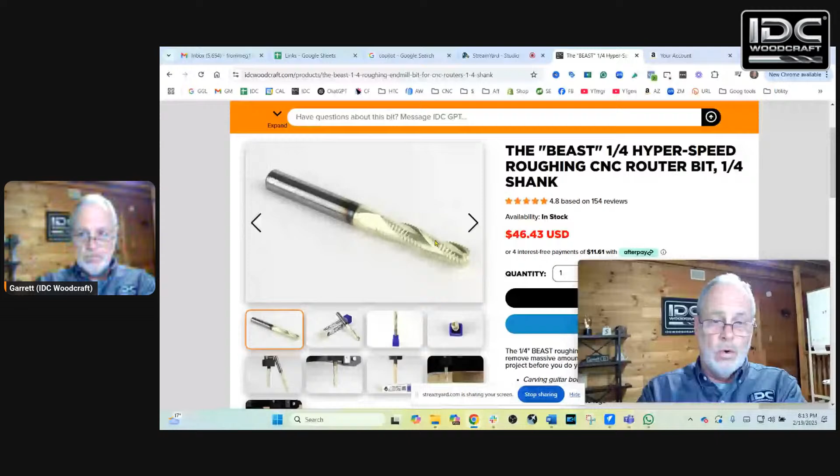We have that in 1/8 inch. We call it the Badger. We have a longer Beast, the 1/4 inch, and we have 3/8. Let me see if I can find it here. Yeah, right here. We've got it in 3/8 short and 3/8 long, and 1/2 inch short and 1/2 inch long. So if I can get my camera in focus, there you go. That's the 3/8. We call this the deep slayer.

So if you are looking to remove a chunk of material really fast, that'll save a lot of time and it'll spare your bits. And these roughing bits last a lot longer than the finishing bits. If you ever hear someone say finishing bits, that is like your upcut, your downcut end mills, the ones that leave a nice clean finish. That's the terminology we use in machining, roughing and finishing. So yeah, it cranks out the sawdust for sure.

All right, so Dan, got a question. I want to know if you can use a profile cut to cut out the large parts first, and then come back and go over some paths that use a smaller bit for the details. So no, if you're going to do a cutout first, right?

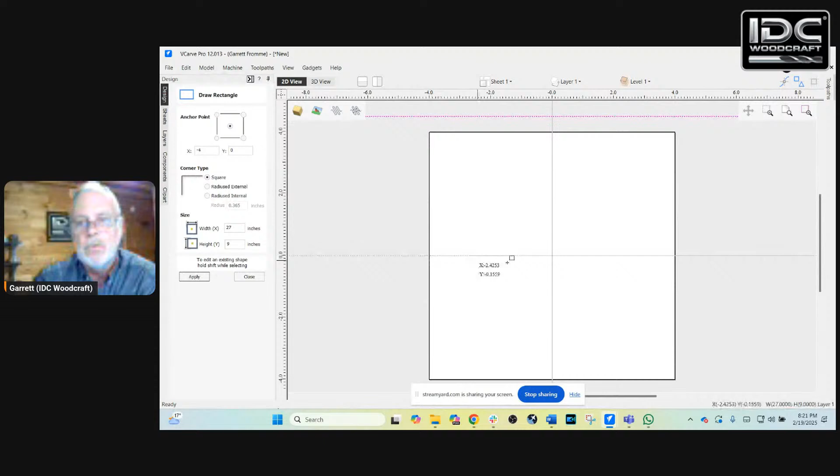Nope, that was a rectangle. I want a line. I'm going to do a line there to there. And this whole project is 8 inches. So I'm going to escape that. We're going to go over to toolpaths. I have the vector selected.

Now if you have Cut2D, I don't think you're going to have the fluting toolpath. You don't. Okay. If you have Cut2D, you don't have the fluting toolpath. So the third row down, it's the first icon to the left. When you hover over it, it says fluting toolpath. And you set your start depth and you set your flute depth. So we're going to set this at a depth of 0.5, half of an inch.

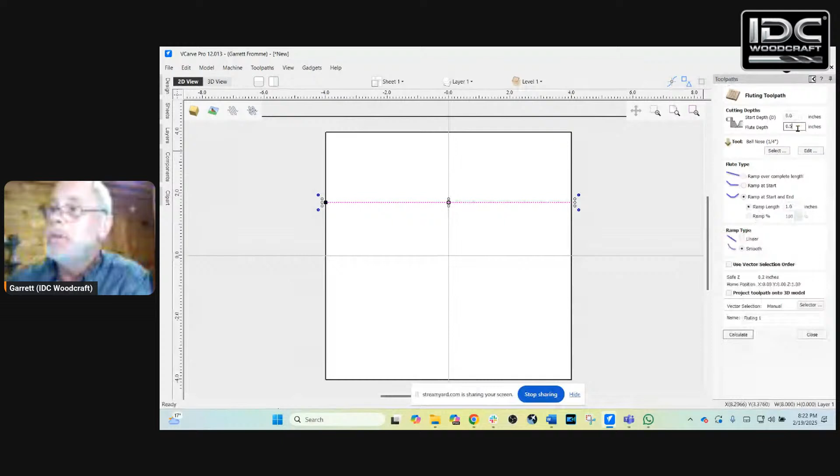Then down below that, it says flute type. And you have a straight ramp over the complete length, which is the first selection. The next one is a ramp at the start, and then it will go straight. And then the third one is ramp at start and end. And then you can set your ramp length. So since this project is 8 inches wide, I'm going to set my ramp length to 4. And that's going to be half the distance of this line.

And with this third item selected, it's going to start at 0 on one edge, go down half of an inch to the middle, and then it's going to come back up. Now I can tell the ramp type down below, where I have a straight ramp or a linear ramp or like a curved ramp. So we're going to click the linear ramp, and I'm going to calculate this. First I got to select my router bit.

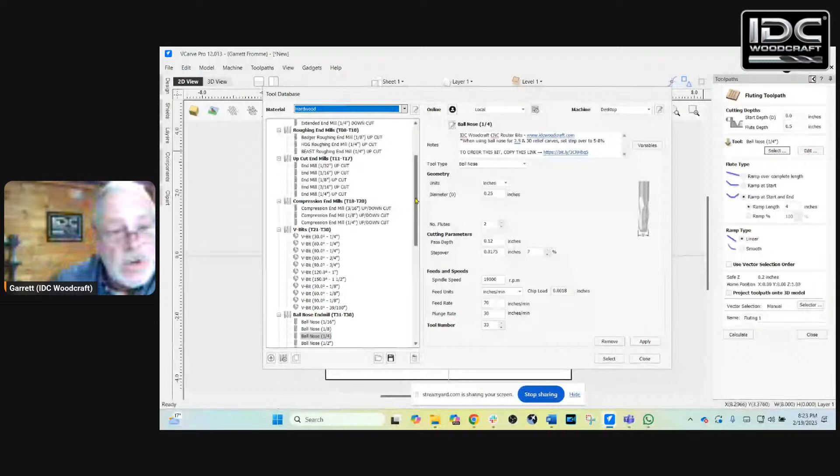So I'm going to grab my 1/4 inch diameter ball nose and select that, and then we're going to calculate this. And we're going to rotate that up and zoom in a little bit. And you can see this kind of V shape in the tool path. So what that's doing, it's starting at the top edge on the left. It's going to make 2 different cut passes. And it's going to be a V shape going to the middle. And it's going to come back out.

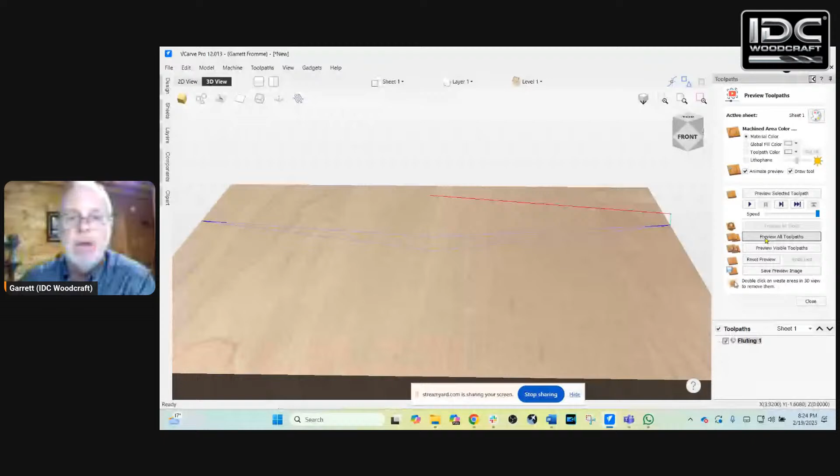So we're going to preview that tool path and rotate that down. And it's got straight lines towards the bottom of it because the bit wasn't wide enough for that. But you can see, I'm going to rotate that around. It actually goes down and comes back up. So fluting toolpath is what you want to use for that, based on what I am seeing you are asking here.

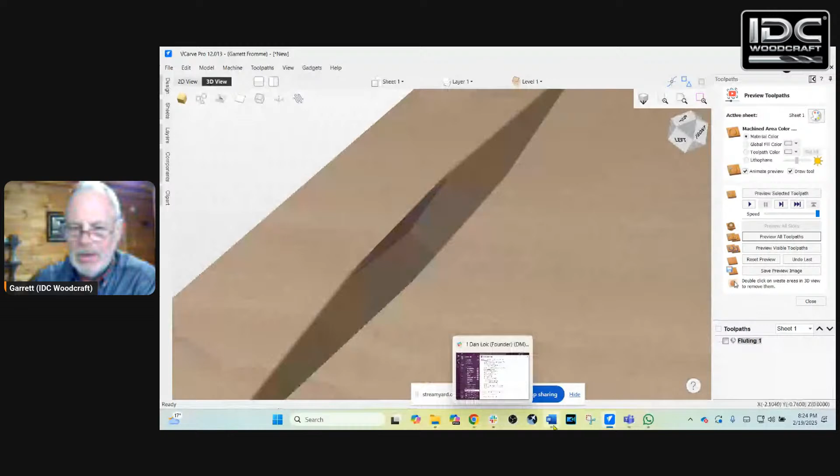Yep. So Tim, you can set the ramp length down for how far in, so it can come down a little bit, and then it'll go across, and then it'll go back up. You can do so much stuff with the fluting toolpath. One of the great little things for fluting toolpath is for making a soap dish. You can make your water drains just go out at an angle. So it's very cool.

Okay, so did you make a video yet, Liberty? Liberty, I'm going to bring you out. You can talk to them about what you got on the plate. I told Liberty it's time to come up with another project, and I think she's brainstorming with some of the ladies. Got anything going on?

Yeah, actually. So I'm working on the Vectric tool paths for 2 different projects right now. One, I had the ladies on Women Who CNC help me out and give me some input on. And my only struggle with that one right now is finding a piece of wood that will work, or braving the skills of gluing wood together. So how big is the project? How big is it? About 12 inches, maybe 15 by 10, but it's like 3 to 4 inches thick.

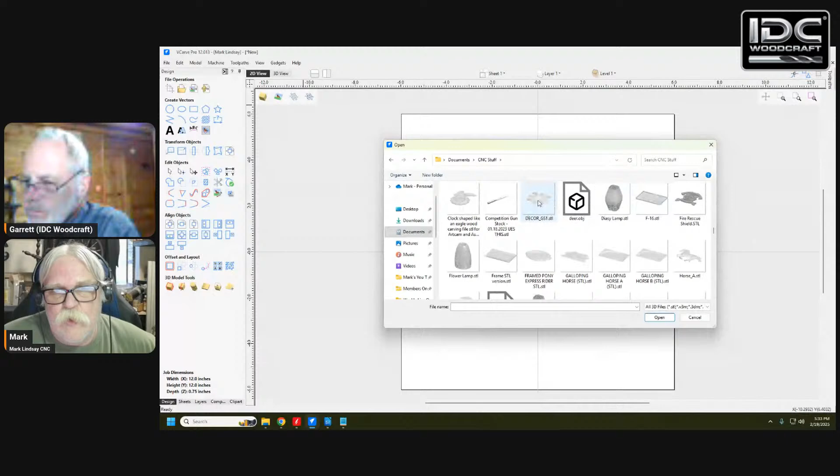Okay, so what I'll do is I'm in VCarve 12.0. I'll go up here to import a component or 3D model. You can also go through the file menu, import component or 3D model. It doesn't matter. They both do the same thing. Then I'll click on that and I've got some CNC files that I have saved here. Let me come down here and find one to play with. Oh, I'll use this one here. It's kind of a snowflake type of a file.

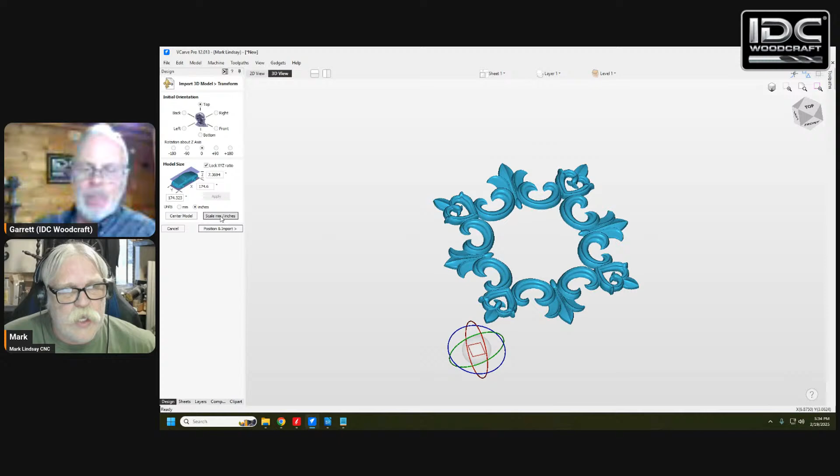I'll import that and it'll switch me over to my import screen. It's not really a snowflake, but kind of a snowflake. All right, now from this screen right here, we can see this red square down here. That's my actual material size. If you ever see this, this was created in metric. If we look at the size, 174.6 inches in X. Yeah, no, it was done in metric. So I'll just click scale millimeter to inches, and that brings it down to a more reasonable size.

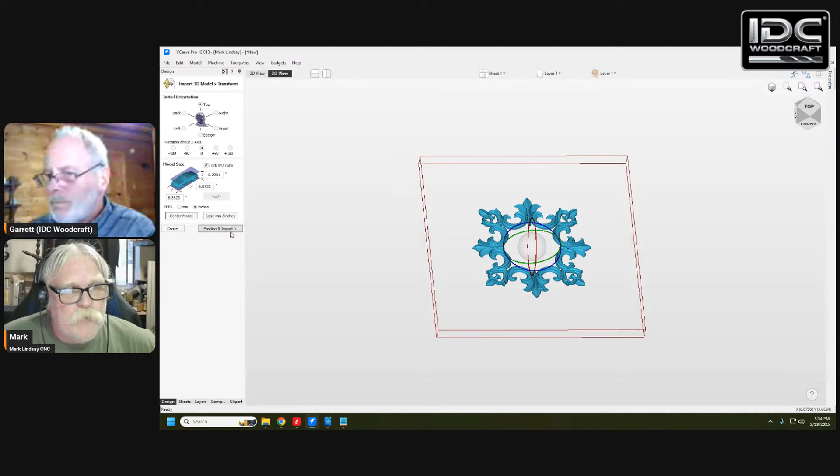Then I'll select center model. And that's got my model placed roughly in the middle of my material. And that's fine. I can do any scaling I need to do once I have it imported. So now I just want to position it. So I'll click on that, go over to position and import. What I'm looking for here is this gray plane is our modeling plane. That's our plane out in the program when we start creating the model.

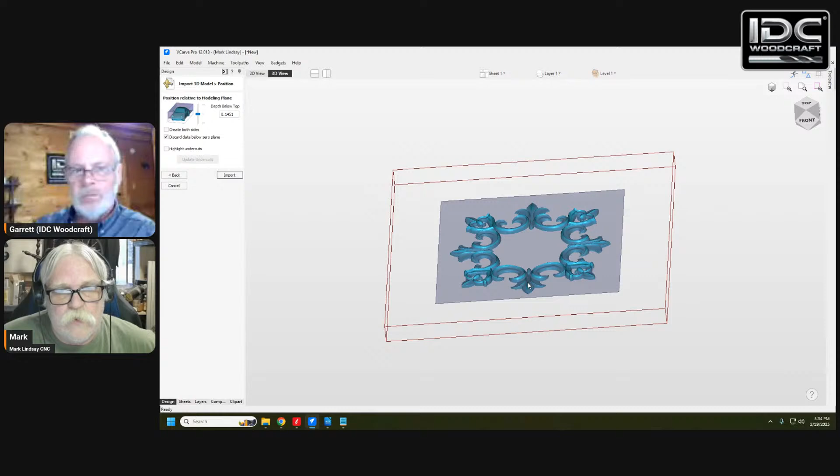What I want is, you can see how some of this is real bright blue. Some of it has a gray cast to it. Everything in gray is below that plane. So I need to bring the model up so that the bottom of my model is on this plane. And you do it with this slider right here.

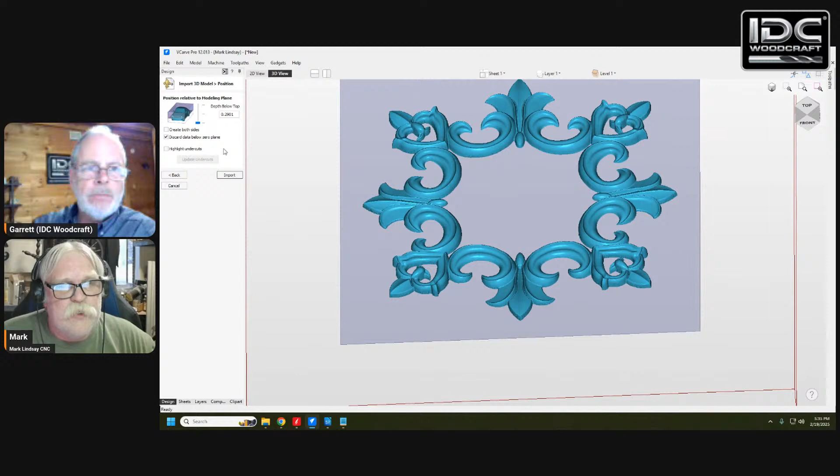Now, you have a couple of choices. If this is something like an egg shape, a complete egg, or a ball, a sphere, something that has a top side and a bottom side, you can import both sides. But on something that has a flat back like this, I want to discard anything that's down below this gray plane. Now, in this case, there's nothing there, so that's fine. Everything here looks good to me. I'll import it. Then that brings it in, and I'm looking at it in the 3D view.

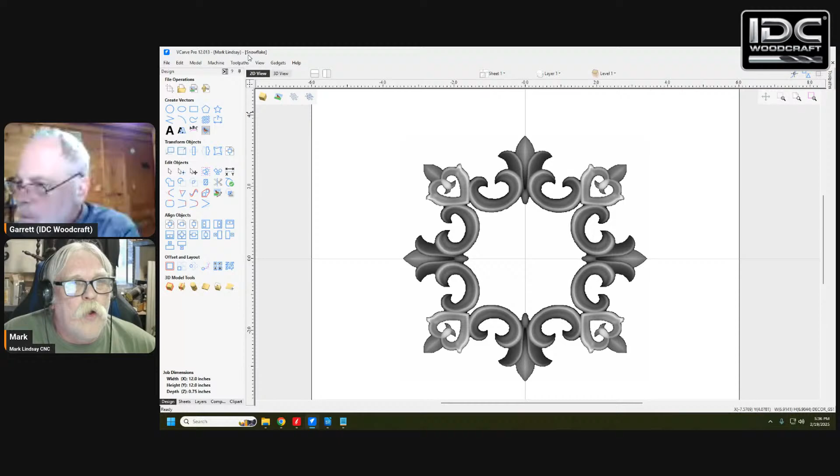Now, from here, I can look over my 2D view, and there is the grayscale bitmap from that STL file. From here, all I need to do is go over and save as. So I'll put it on my desktop, and I'll call it Snowflake. And save it. I no longer have the asterisk up here, and I have the title. Now I can close it. Now, I shouldn't have done that. Sorry about that. There's the file right here on my desktop. So now I'm just going to double click that file. And there it is with my 3D model.

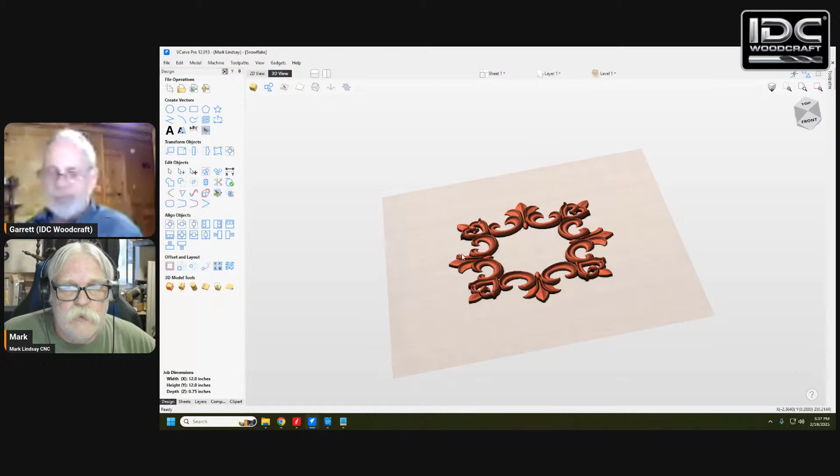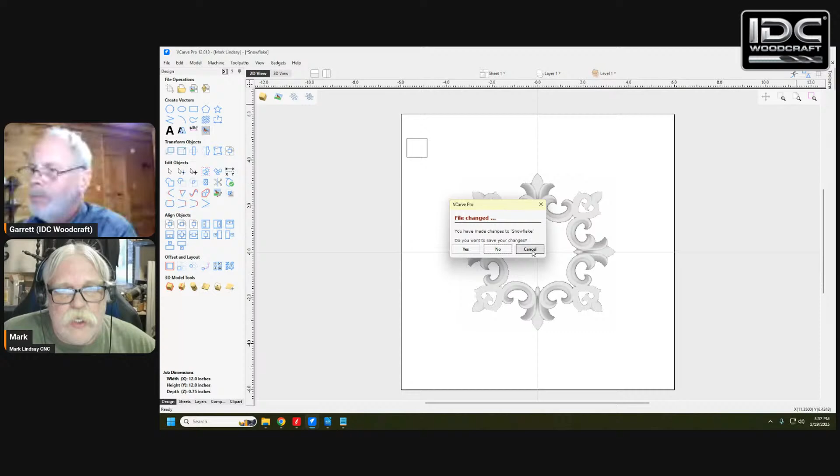And so it should save with this model if you have saved it after the import. If you don't save it, it should ask you. Let me do something simple and silly here. There. Now I've made a change. I have the asterisk up here next to the title showing me that I have not saved it since I made that change. Now, if I close it, it's going to ask, you've made changes. Do you want to save those changes? I can say yes, no, or I can cancel closing. But it should save with the 3D model if you have saved it after import.

Okay, and it would save with the 3D model as a CRV file, right? Yes, it's saving it as a CRV file. Now, because it's VCarve Pro, that's really all you can do. In Aspire, once this is imported, I can save this as a piece of clip art to put in my clip art library. But that's Aspire only. Okay. So you can't put it in your library. Right.

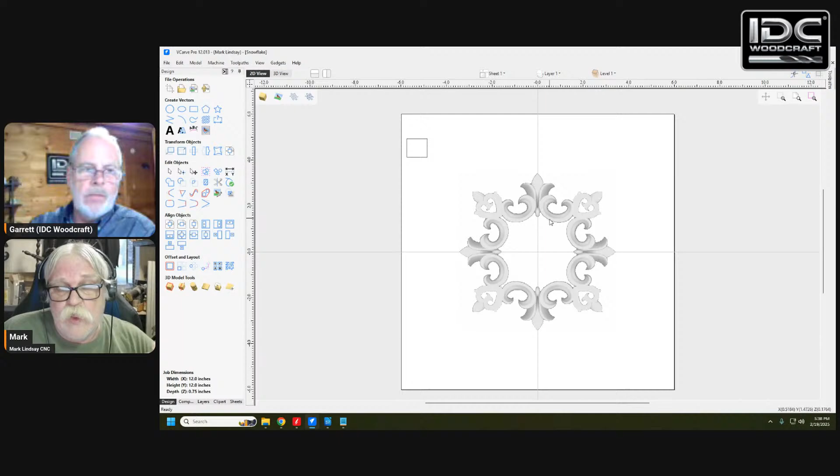You can, but what you're doing is you're putting the entire file into your clip art library. Oh, gotcha. So any toolpaths you create or anything like that will also be added in your clip art library. But there's nothing wrong with that. If you use it a lot, you certainly can. Okay. But if it's not saving with the STL file imported, shoot an email to Vectric support and let them know, as you may have an issue.

All right. Cool. All right, folks, I do know that my image is fuzzy. I have slow internet where I'm at. We are working on it, but it's not hardwired in. I had one internet service and then got another one. Now I have satellite service, which still is not as good. So the team is diligently working on that. All right. Let's see. Okay.

Someone's asking Jeff, Altmill, is it really worth the money? Well, folks who have an Altmill CNC router, I'm assuming. Yeah, I was going to say, I think he's talking about the Altmill, but I'll shut up. Yeah. Folks, for those who have an Altmill CNC router, let's let the audience speak about it. But I will say what I like about the Altmill. Number one, its price point for its performance is

nuts. I would not have expected a 4x4 machine to come out at a $3,100 price point range, and when it does the STL files, it's so quick. They really focused on shortening the acceleration and deceleration time, which, yeah, super quick. So I will let folks who own it give you their input. Let's see, Ed says Altmill is almost certainly worth the money.

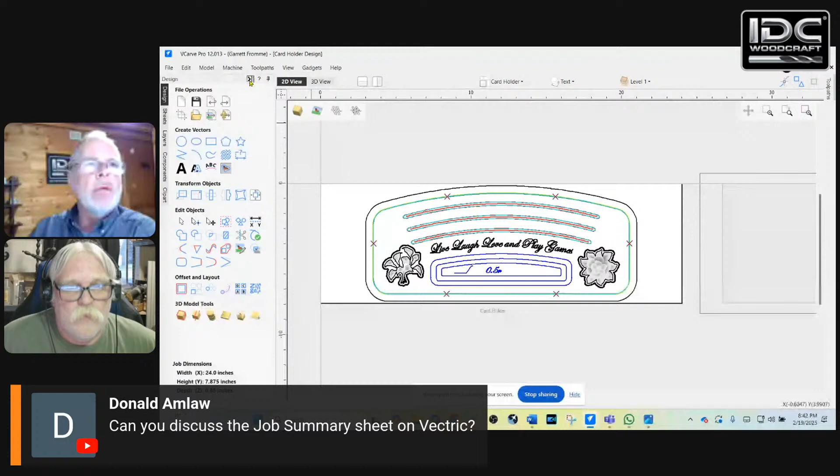So this is the card holder, and I'm going to go over the toolpaths. Oh, perfect. All right. And so right next to the save toolpaths button, there is a button. It's like a little piece of paper, and it says create job sheet. When you select that, it's going to ask you where you want to save it. It automatically titles it Card Holder Design Summary. Card Holder Design is the name of the file that has this project in it. And when I save that, I can go into my directory and we can open that up.

And I now have this summary. It shows the drawing. It shows a lot of information about the zero points on the project, where the router bit's going to be at the home position. It shows all the router bits themselves. This I'm going to send to Vectric, because when it creates a second line on the router bit name, it doesn't create the second line for the other one. So the router bit names are running past the actual toolpath name. So it's got all the toolpaths. They are aware of that, and a fix is coming.

Okay. All right, cool. Yeah, so it's got the toolpath summary, and I'll let Mark talk about the rest of it. Well, basically, that's it. Everything you said is pretty much it. They are aware of the times not moving down with the first line of each bit, and a fix is coming for that.

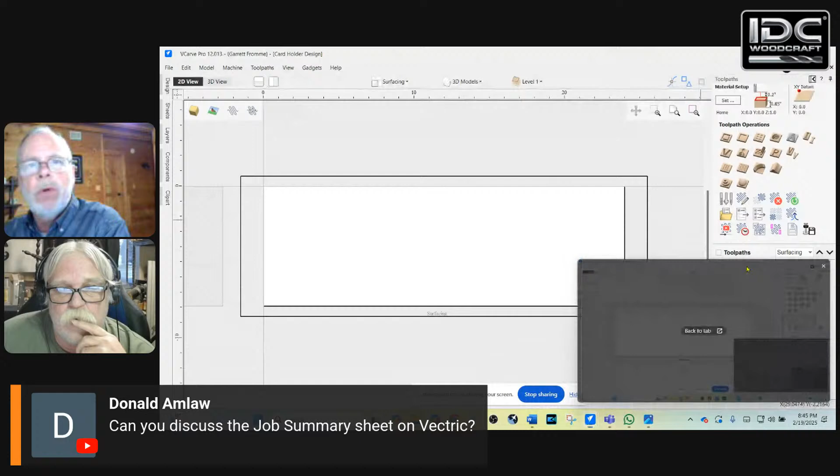Donald Amlaw is asking, can you add notes to the summary? Yes, you can. You do that in toolpath notes. When you go to save the toolpath, you can put notes in there. Well, maybe here I'll switch over and you can show me where to do that. Okay. Let's see. When you go to save your toolpath, I gotta shut this screen off.

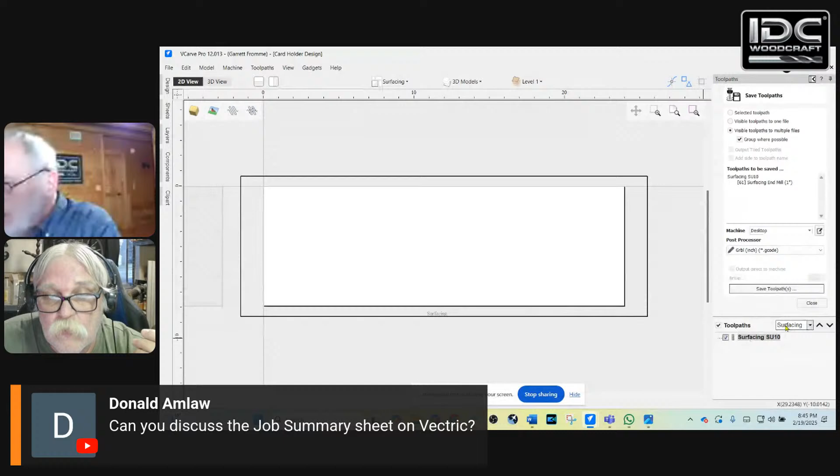Okay. When I go to save, right there should be notes. Okay. So select the toolpath, I got the toolpath, and there isn't a notes blank there. No, let's go to the other one here. Wait a minute. So I got all the toolpaths, and I don't see a notes button here. Huh. Okay, let me jump in and see if I can find it. Now I've got to remember where the heck I had that.

But anyway, this job summary is very helpful because, number one, at the top you have your design. Then they tell about the material setup, and they have the size of the material. Then they talk about the home or start position. Like if you do the lower left corner, it tells you your Z datum position. For this one, the Z is at the bottom of the material. Oh, I'm sorry. The home or start position is at X0, Y0, and then a Z 1.85.

Right. And here it tells you what corner you're going to zero out on. And then here it's got your pull up, the clearance. So when the router bit needs to carve and then has to pull out to move to another spot, in this case it'll pull up 0.2 inches and then do a rapid move. The toolpath summary: this is all the toolpath names in the first column.

That's where toolpath notes is. Okay, where? Where's toolpath summary on the software? I'm sorry, I had the wrong one. Okay. Close that and go into toolpath summary. Right there, that would be the clock. There's the notes field right there. You can enter your notes right there, and that's where you can put notes into the job summary.

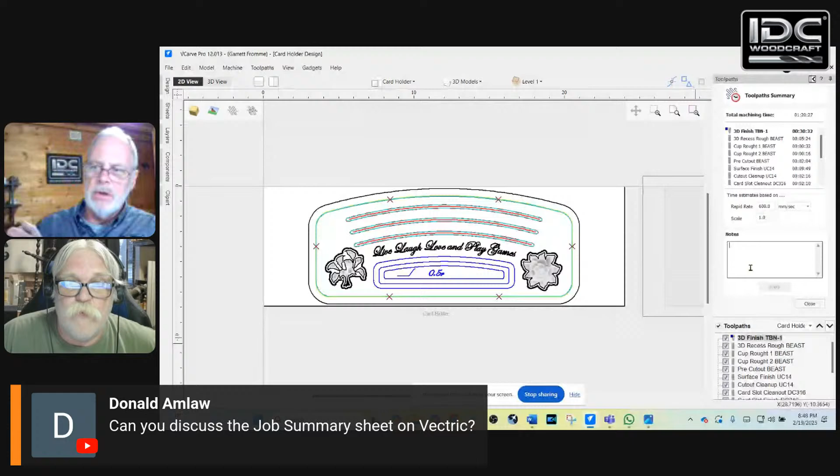Okay. And is this not a note for toolpaths, but like a general note that you can put in? No, this is a note for toolpaths, and you can select which toolpath you want that to appear in. If you just want general notes, that's something else. All right. So I am on the fourth toolpath. I'm going to say hello, Mark, and then I'm going to close that. You have to click apply first. Okay.

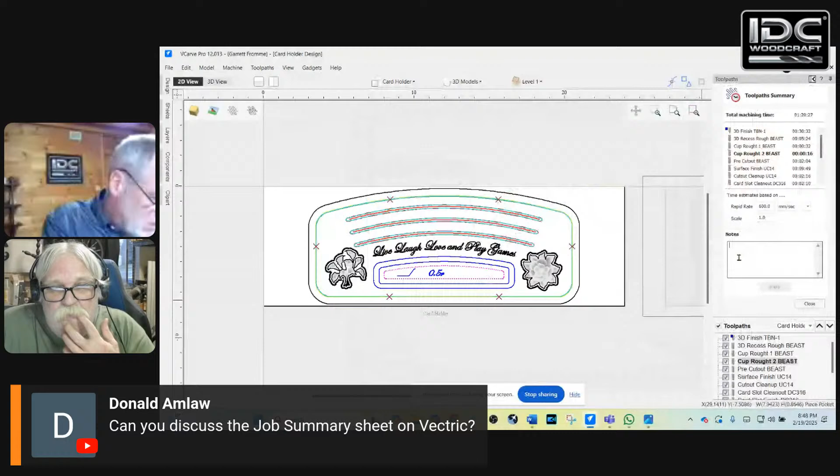All right. Oh, I see. So hi, Mark. So I'm learning here too, folks. There's a little apply button there. And we're going to close that. Now I'm going to do the job summary again, and we're going to type in job summary 1. And I'm going to go to my directory and open that one up. Where is it? There it is. Job summary.

Okay. So I put it in the fourth toolpath. So there's all the toolpaths. There's toolpath number 1, that's the toolpath name and all the information about that toolpath. There's number 2, number 3, number 4, and so it should put hi Mark in this one. I believe it's the fourth one. I thought it was.

Okay, it's putting in. No, folks, we're learning too. It's putting in the tool. Okay. It's not adding toolpath notes. It's just adding tool notes. Okay, it appears that you're going to have to put that in the... Oh, wait. Always ramp it. Okay, no, that's fine. Never mind. Nope, it didn't add it. Wow, make me a liar here.

Well, you know what? I hate doing things by memory. I'll have to play with it. Well, you actually did it once in a different thing that we did, and it showed up. So,

So that's the job summary, folks. It's a really good, handy tool to have because it prints everything out in order of your order of operations. It gives you every piece of information you need, including your material size and all that good stuff.

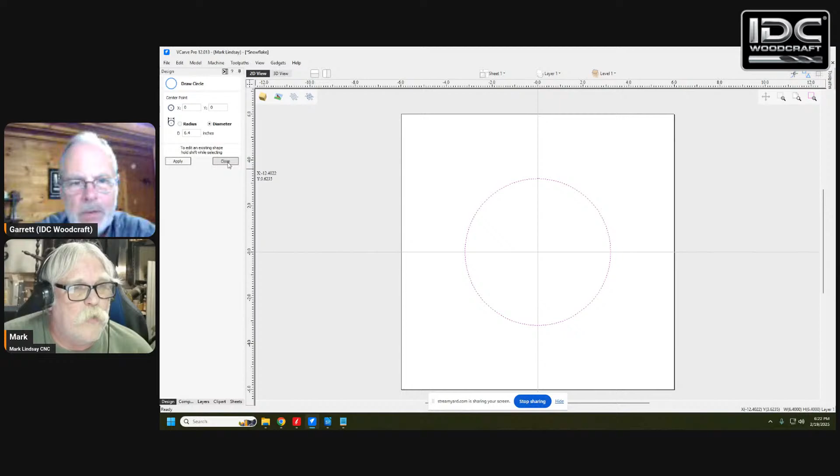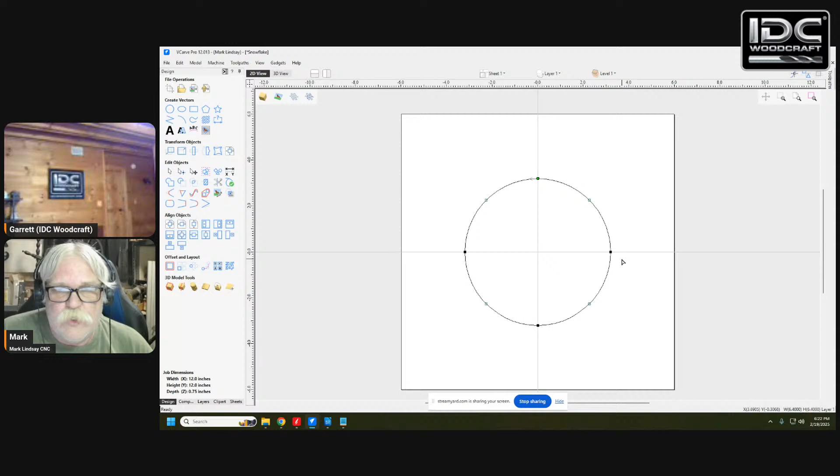Okay. Making a circle here in the center of my piece of material. Now, I'm going to make 2 arcs out of this circle. If I'm putting text all the way around the circle, then you still need to pay attention to this. I'll tap the letter N on my keyboard to go into node editing. And we see that I have 4 points here. Now, if we look, my start point is right here. And the direction, you can see an arrow. I'll zoom in, but the arrow is not going to get any bigger. You can see an arrow right here saying that the circle is going this way.

You want that circle to be going that way. We read left to right. If you draw something, it's going to draw right to left. It'll be backwards and or upside down. So what I'll do over here is I'm going to go to this side, and I'm going to right-click that point, and I'm going to cut the vector. I'm going to right-click this point, and I'm going to cut the vector. So now I have 2 arcs.

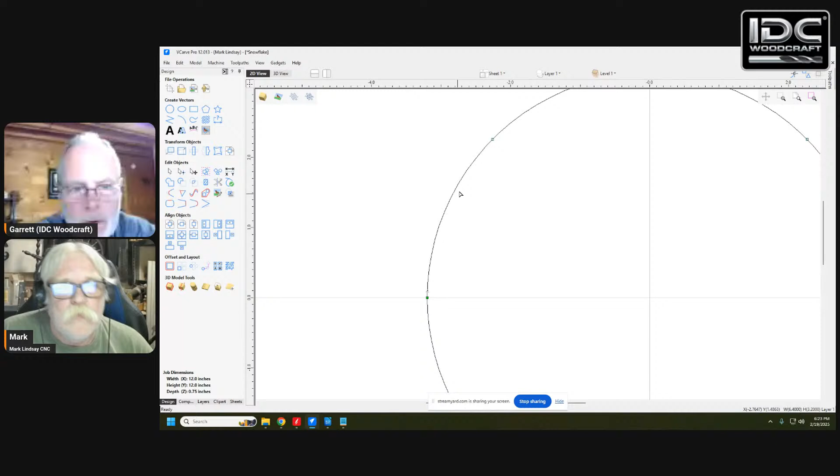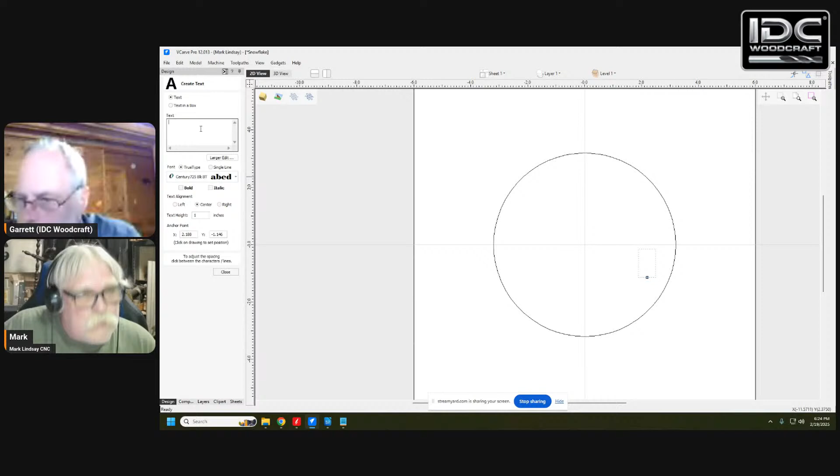Now I've got this arc with the arrow pointing this direction. My letters are going to follow it that way. If I look over here, select this vector, this is my start point. My arrow is pointing that way. My letters are going to go in that direction. That's what I want. Now, let me create some text. And I'll just type my name here. And that's way too big, but that's all right. I'll shrink it down, make it a bit smaller. And I'll put it right there just for giggles.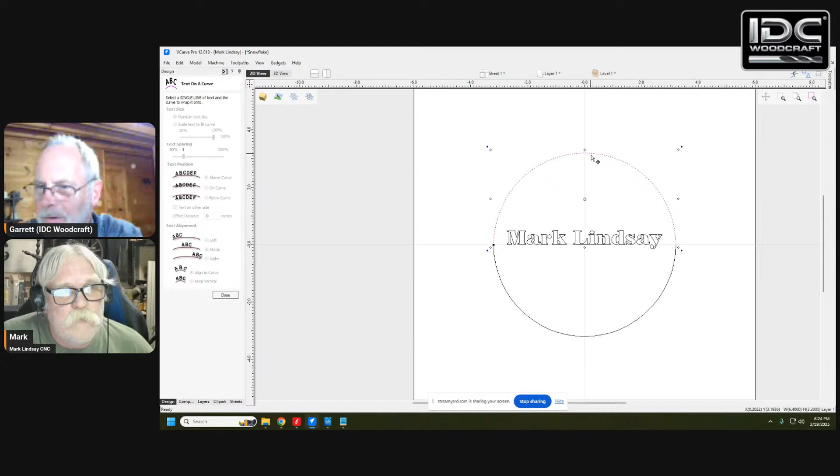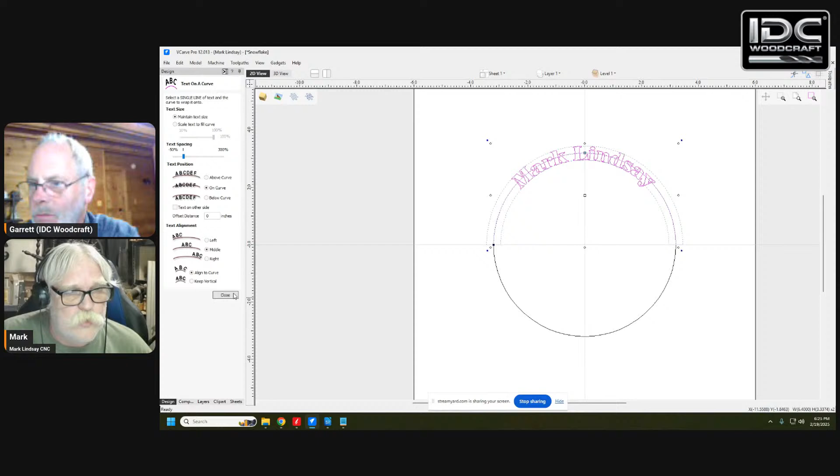Now I'm going to come over to this icon right here. Put text on a curve. I need to select the text first, then the curve. Now you notice that jumped up on top. I can have my text above the curve. I can have it below the curve. Or I can have it running right through the middle of the curve. But the important thing is that start point has to be over on the left. If the start point is over on the right, and I'll do that just to show you what it does, I'll go into node editing here, and I'll make this the start point.

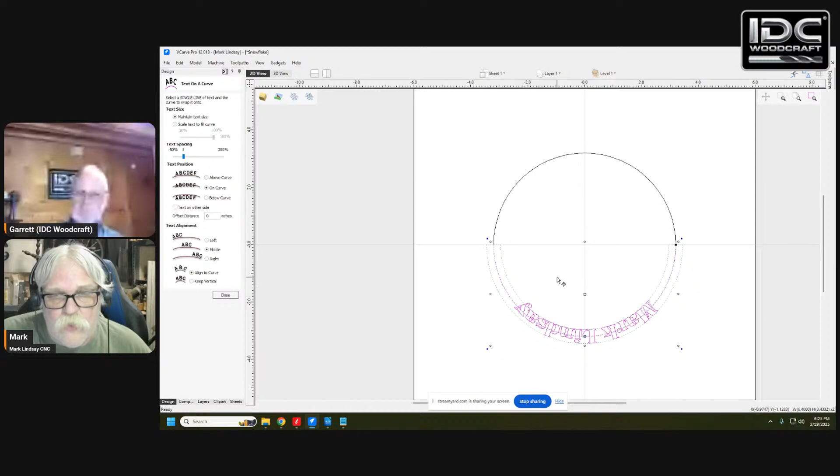Okay, now if I go to text on a curve, I select this text and this curve, it's upside down and backwards. And it's all because of that start point. So if I Control Z to undo that, get out of here, Control Z, select this, go back into node editing, make this my start point. Now I can select my text, go into text on a curve, and it's the correct way.

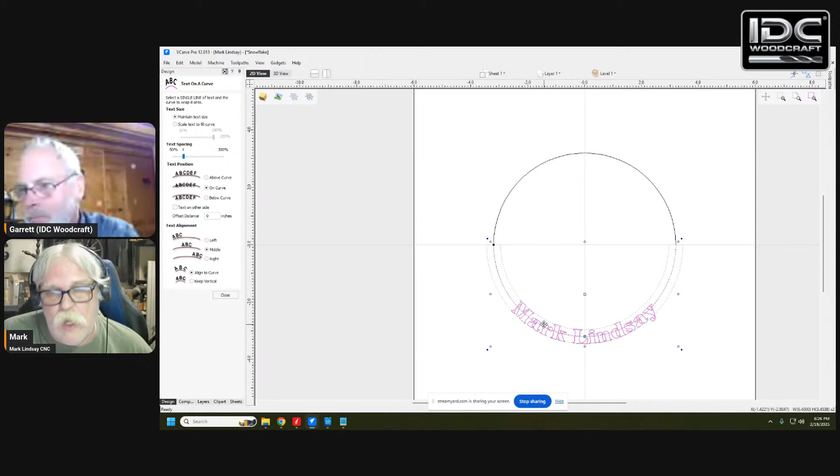So that's basically it. Your start point has to be on the left for either top or bottom.

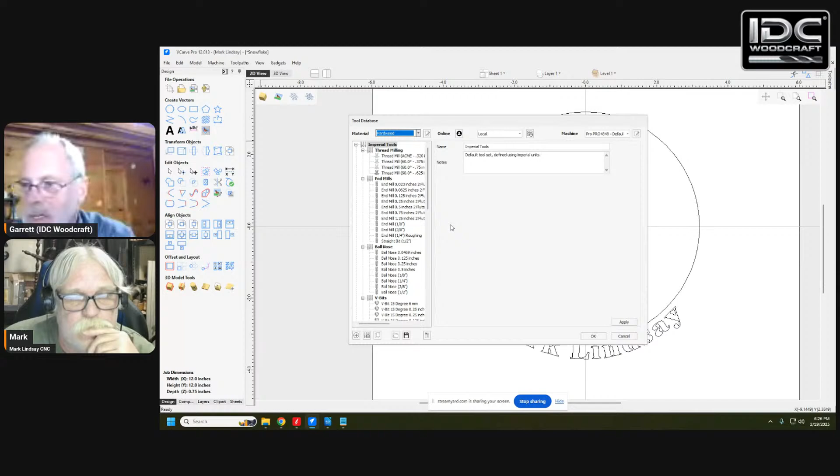There's no way to mark these really as favorites. So if I pick my 1/4 inch end mill, there's no real way to add this as a favorite. But what you can do is you can cheat by adding it as a material. If I come up here next to material and click this down arrow, I've got several different types of materials. I'm going to add a new one and I'll just call it favorites. Okay, and apply. And now I'm in my favorites tool category.

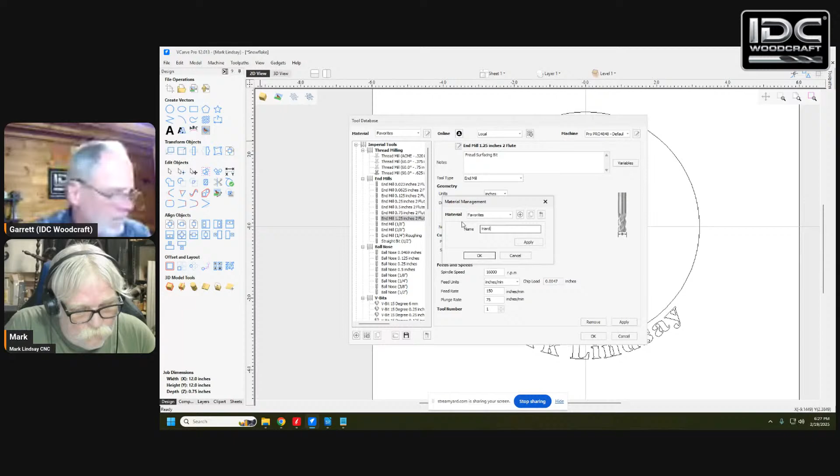Let me check on this. Am I in that? Yes, I am. Well, now wait just a minute. I didn't add this, did I? Pulled all the data. What I was thinking, Mark, is it pulled all the data over there. It sure enough did. Oh, I renamed this one. That's what it was. Holy cow. I didn't add a new one. Let me go back and change that. I didn't add a new category. Come on, Mark. You know how to do this. Yeah.

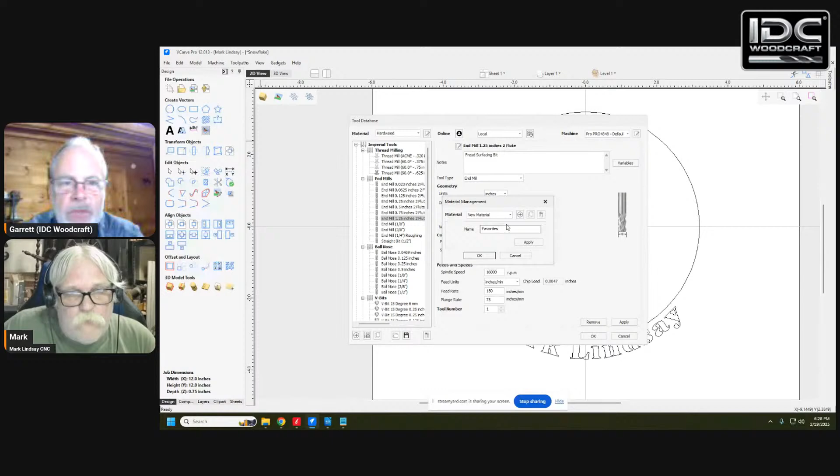Okay, now here's where I want to add a new material. Add a material to the database. There we go. That's what it was. Good grief. Favorites. Click apply and click OK. That's how it works. So I still have my hardwood. That's what I was looking at.

So you'll go into the open material management right here. Click on the plus button to add a new material. Then name it. Now I have my favorites right here. And if we look at my 1/4 inch end mill, I have no settings down here, nothing. I can copy the settings from this tool for my machine from the hardwood category, click copy, and now I have this bit copied to my favorites. I click apply, and you'll notice that my bit is active and highlighted right there.

I can do the same thing with other bits if I want those in my favorites. Then I can put all of these favorites into one group if I choose to. I can't remove these bits from just this material. It's just this is now the only bit that's within my favorites category. I don't know if that helps or not. Yeah, that's one way of doing it.

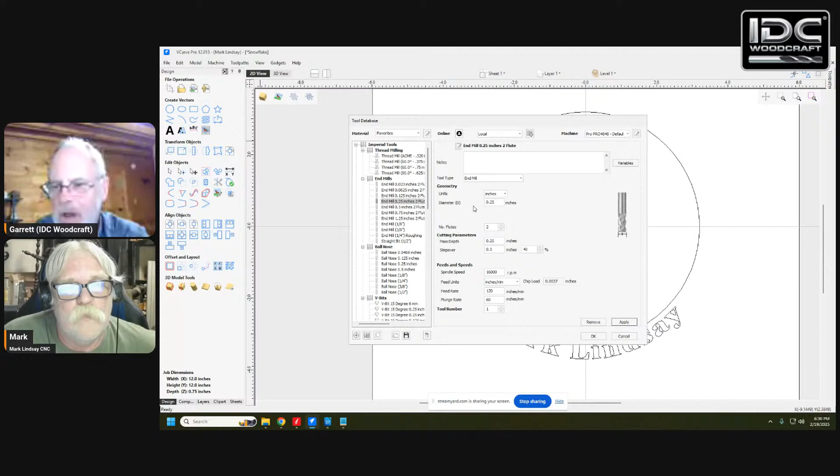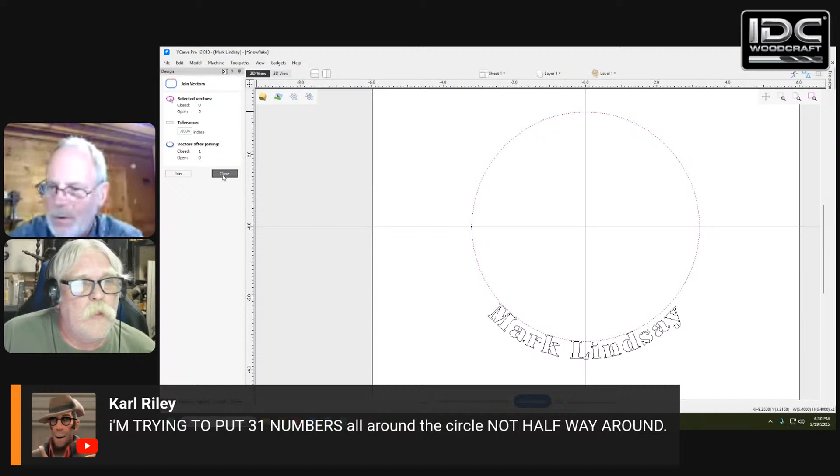Karl is saying he's trying to put 31 numbers all around the circle, not halfway around. Oh, all the way around. Okay. Well, then here's what we'll do. We will join those vectors, so we get one closed vector. Now let me go in here. Come on. Join. One closed vector.

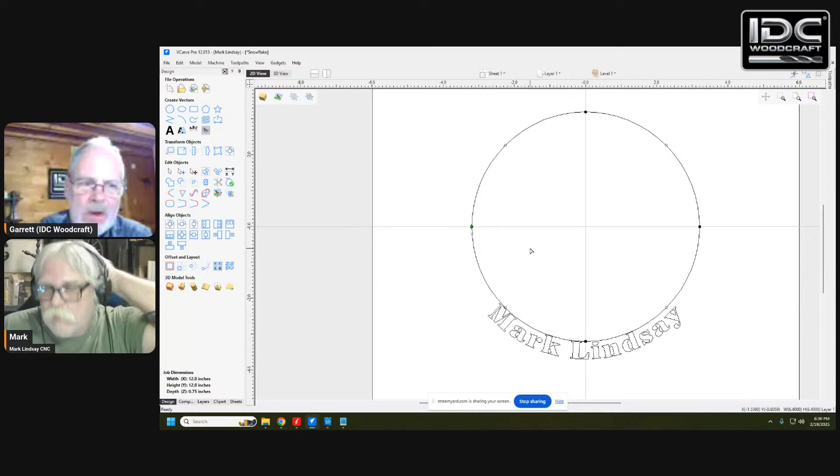Okay, so if I want to do that around the circle here, let me go like so.

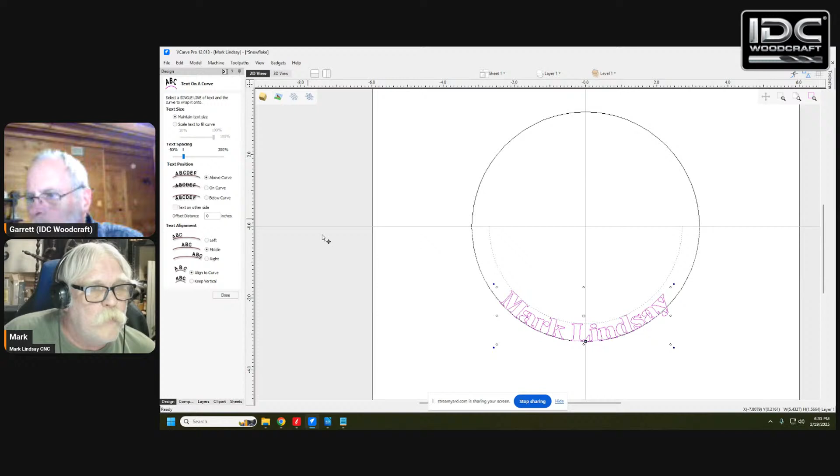And I want to go above the curve. And it's not going all the way around the circle, but at least it's correct. The start point, I've got to get out of here. The start point is here, and my circle is being drawn in this direction.

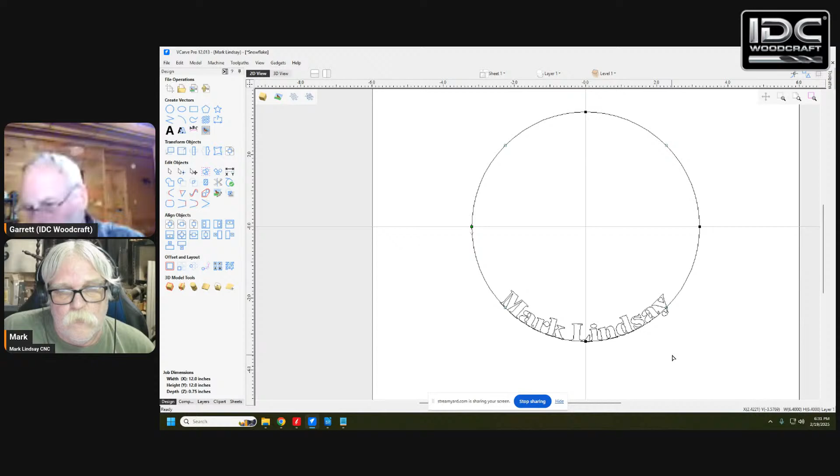Now you're trying to put numbers around the circle for like a perpetual calendar. I have found about the only way to do that really is one by one. And what I'll do, no, forgot I was in node editing. What I'll do is I'll just draw a small circle, say a 0.25, and I'll put it, say, right here. Close. And then I will do a circular array.

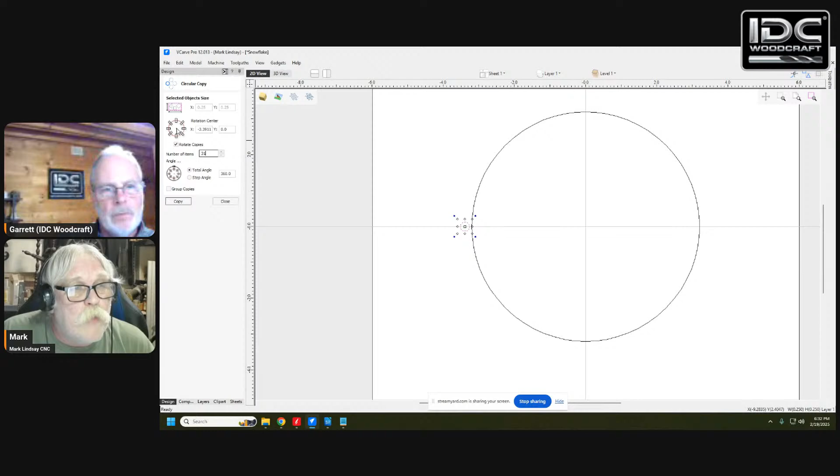I'll do an array. I want a total of 30, I believe he said. Yeah, 31 is what he wants. 31. Okay, 31. Oh, it's calendar. So, yeah, that makes sense. My rotation center, I want to be the center of my material. And I want a total angle of 360. I don't want to group them. I want to copy. And I've got 31 circles evenly spaced around this circle.

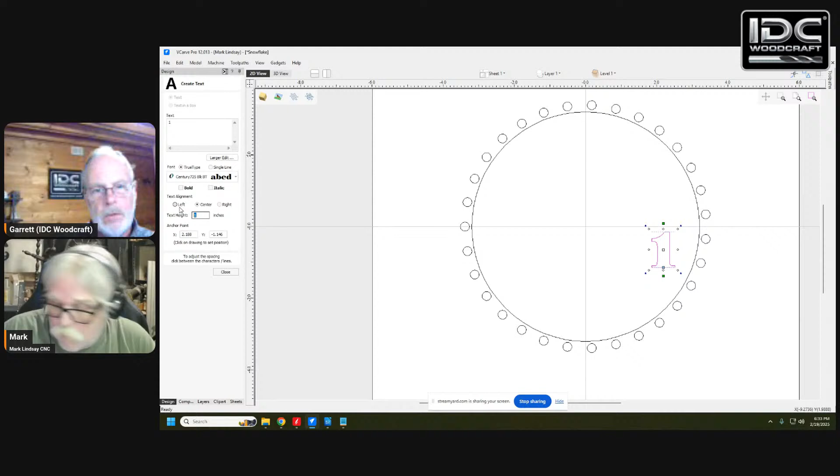Then what I'll do is I'll just create my text, make it all the right height. I want, let's say, 0.5. Close, and then drag that up to the first position. Obviously, I would need to adjust, but you'd have to do each number one by one. And that circular array spaces them evenly around the circle in the way that you're talking about.

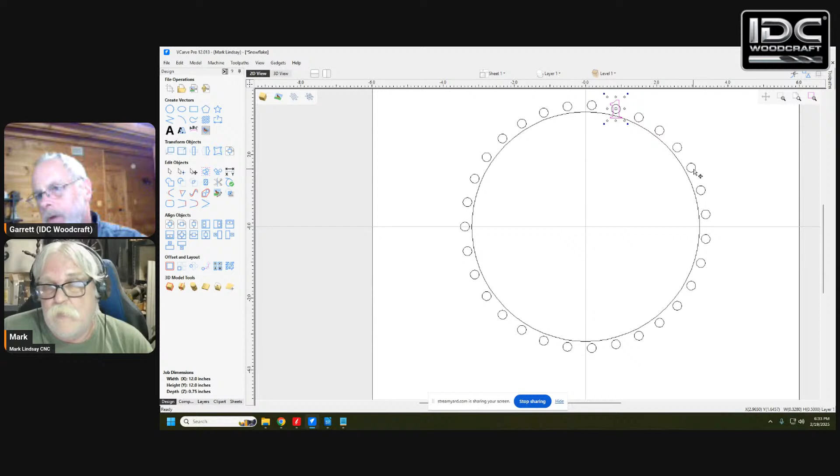I don't know if that's any help or not. And this was just done off the cuff by eyeball. But that's how I've done clocks. That's how I've done anything that's required me to have things spaced evenly. I'll either do a circular array of just whatever shape to use as a placeholder. Right. And then go in and add that text one at a time.

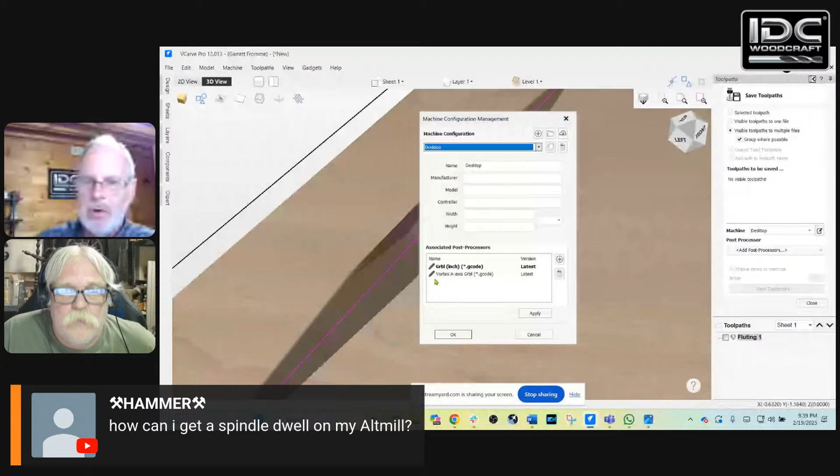I'm going to double click into that. And now there's a bunch of information in the post processor. I'm going to zoom this in a little bit. And so most of this top end information is parameters that the software is reading when it's getting ready to post the G-code. What we're going to do is scroll down. Boy, there's lots of stuff in this one. Holy cow, maybe it's not a good one to do. I got to find where it says to turn on the spindle.

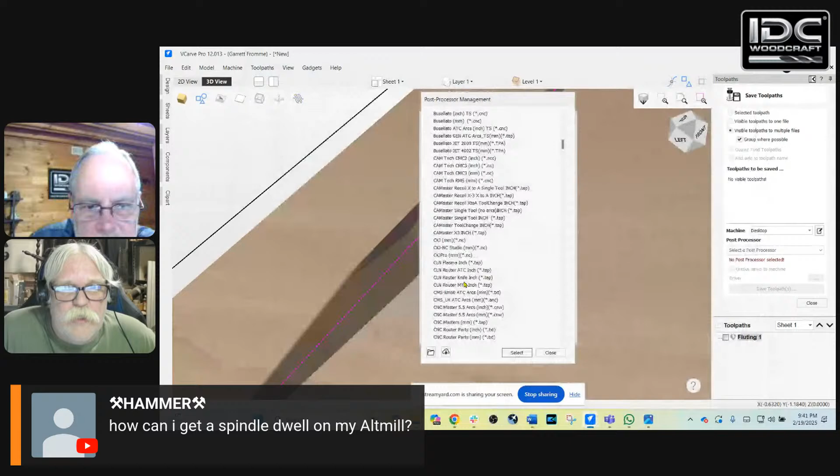Boy, G300. Have you ever heard of a G300? I've heard of a G3. Yeah, not G300. Okay, we're going to do a different one. This one sucks. Right. That's probably for an industrial, pretty heavy-level machine. Industrial machine. You can try one of the Avids. Avid, okay, all the way at the top. Avid, okay, I'll do an Avid inch.

Okay, we're going to customize that. I'm going to right click it, open the file location, double click into the folder, and we're going to zoom in a little bit. We're going to scroll down. This is made for Mach 4. So I'm going to scroll down to where it gives the spindle on command, and that's what you want to look for. So I'm looking for an M3 right there. Okay, so what you're looking for is an M3 command, something in quotes.

And what you're going to do, zoom this in a little bit more, is, so I'm on this line right here where it has an S in brackets, and that S is with the code that's above. It knows that this is the spindle speed that it's going to wind up to. And the M3 is spindle on clockwise command. I'm going to enter, and I'm going to put in quotes G4. Okay, that's telling it it's going to do a dwell command, and then you're going to put a P, and the P is the pause time. And then whatever number you put after that is the number of seconds it's going to pause for.

So the best thing to do is to get an idea how much time it takes for your spindle to spin up to its maximum speed, maybe 24,000 RPMs. And that's the time you should use. That would be a default. So we'll just say 5 seconds. I'll put a 5 in there. So I have a G4 or a G04 and a P5. I close the quotes, and I'm going to save that post. We're going to close that, and I'm going to close the directory.

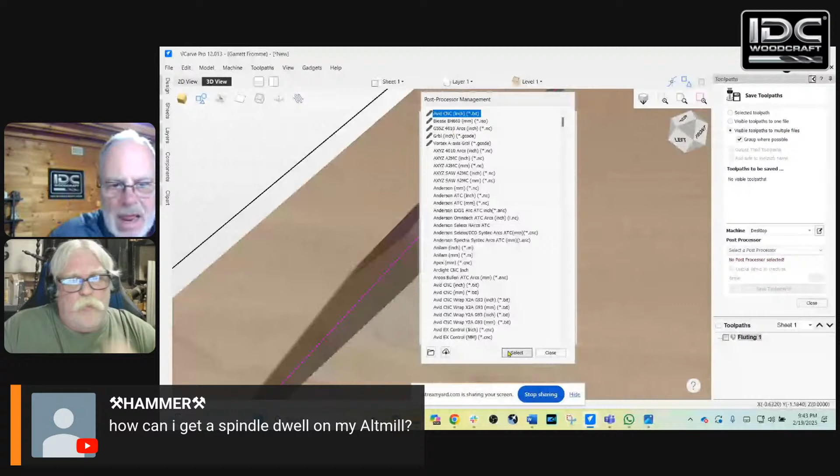And now what I'm going to do is select it. I have that post selected there. I'm going to click select at the bottom, and now that is there. I'm going to say OK. And when we look at the post processor, there it is right there. Do not change the title name or the file name of that post processor. It'll get things screwed up. Just edit the post and know that your post is the one that you are fixing. There you go. That's how you get a dwell. Took me a while to figure out how to get that post edited for that.

Here's one for you, Mark. John, why are the times in toolpath summary not accurate when compared to the running of the job? Because the software does not know how fast your Z is operating, doesn't know how fast your X and Y are operating. It doesn't know any of the variables involved with estimating times. So what you do is, let me bring it up, make sure I'm getting the terminology correct here.

When you enter into toolpath summary, and that's with the clock that we were looking at earlier where the notes were, you'll see your rapid rate. Enter your rapid rate. That is when the machine is not physically down cutting material and you're just jogging on one of the axes somewhere. You'll enter that rapid rate there. You'll decide, is it inches per minute, millimeters per second, or whatever. Then down below that, you'll see a scale factor.